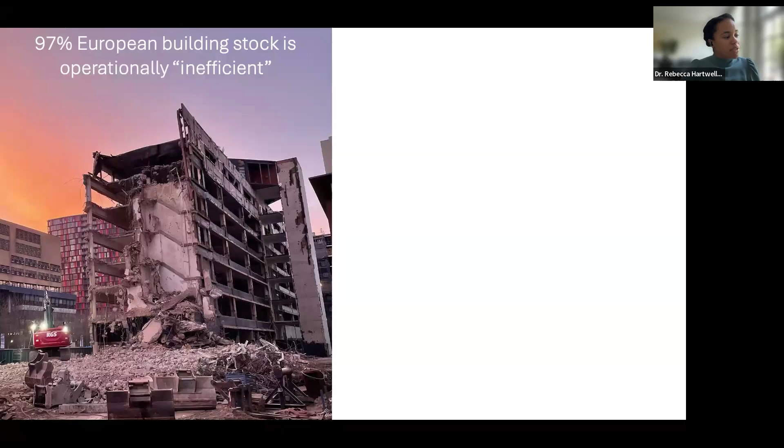Facades and internal mechanical and electrical systems are key contributors to operational performance, and typically within those elements we use high volumes of aluminium. So looking at how we can design those in an effective, efficient way from a material point of view, but also for reuse, is key. There's renovation as a challenge to tackle, but also how we can develop new designs and systems that promote future reuse and high-value recycling.

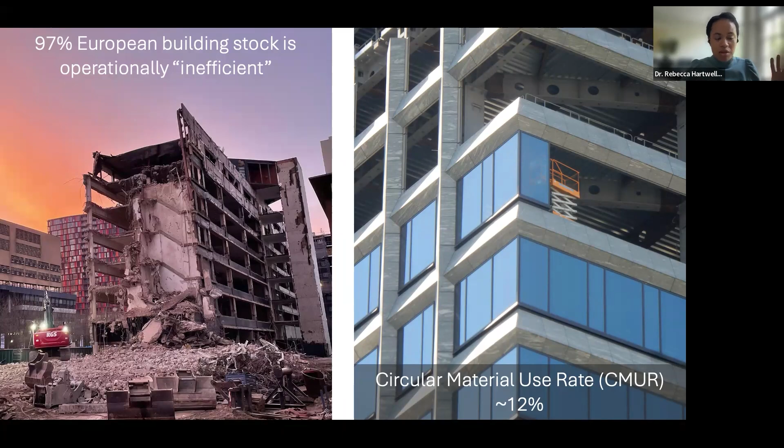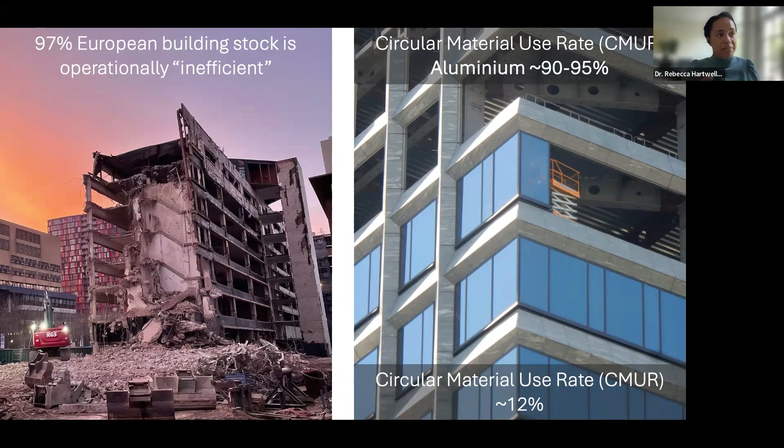The circular material use rate in Europe is around 12%, typically looking at low-grade recycling or other recycling options. For aluminium, that's much higher within the construction sector, around 90 to 95%. But again, this circular material use rate mainly focuses on recycling, which may be closed loop, but not reuse of aluminium elements, which could be a more environmentally valuable route to deploy.

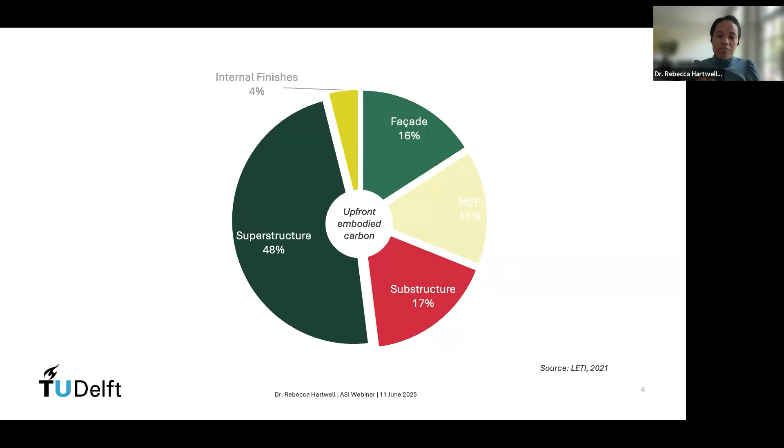If we look at this in terms of environmental impact and embodied carbon, looking at the building as a series of different elements—and aluminium mainly focuses within the facade and mechanical and electrical services—you can see from an upfront embodied carbon perspective, these are relatively high contributors to the total building's upfront embodied carbon. So understanding how we can recover these elements effectively is really key.

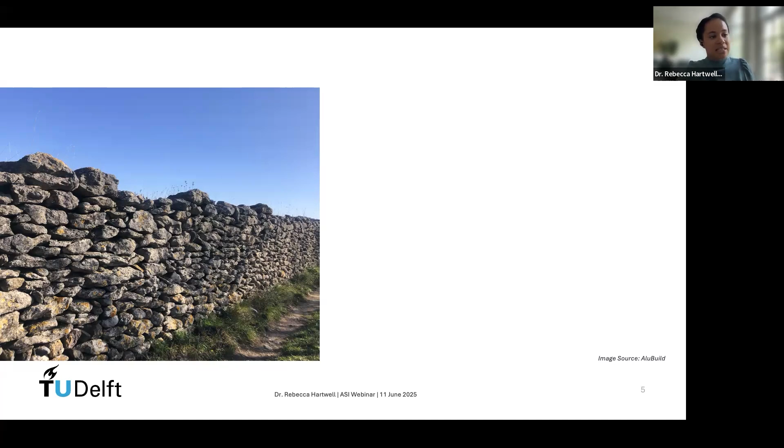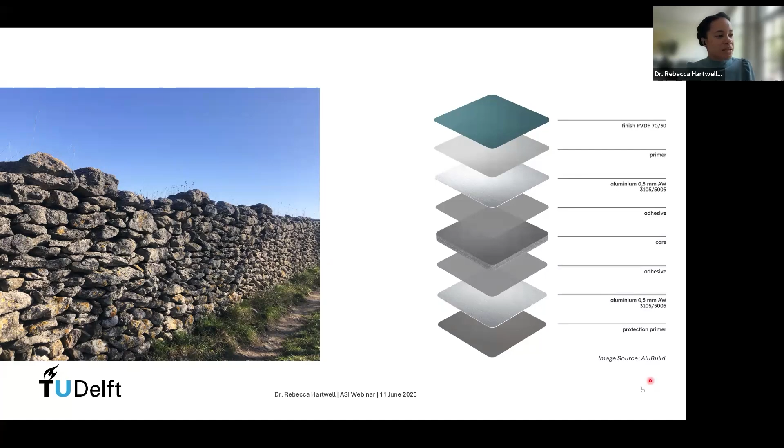But then if we look at the elements we're now incorporating into existing building stock to improve functional performance and operational use, we start to rapidly build up much more complex layers. For example, looking at aluminium composite panel, we may start with an aluminium backing sheet, then incorporate different polymeric insulating cores bonded by an adhesive component, then bond that core to another backing sheet on the other side, and then coat or finish the aluminium sheet. So quite quickly you start to see these complex building elements being built up without much consideration for what will happen at end of life.

There's an interesting concept put about by William McDonough and Michael Braungart in their book Cradle to Cradle, of the monstrous hybrid, which is a product that contains a mixture of materials or assemblies of components from which it is not economically feasible to recycle or salvage the raw materials after their current life. Unfortunately, this is quite telling for many of the building elements we're starting to incorporate in our building stock, or have been for the last few decades.

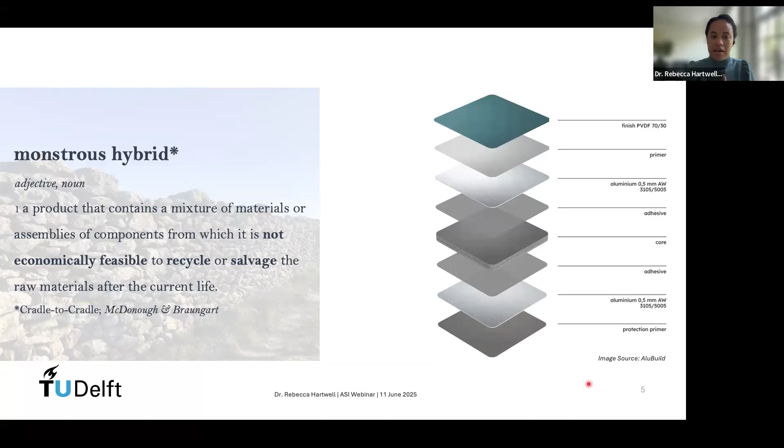My research really focuses on how we can continue to make technological advancements that improve building performance in operation without foregoing this reclamation potential, which I'll define throughout the course of the webinar today. But essentially it's the ability to easily reuse and recycle elements from our building stock.

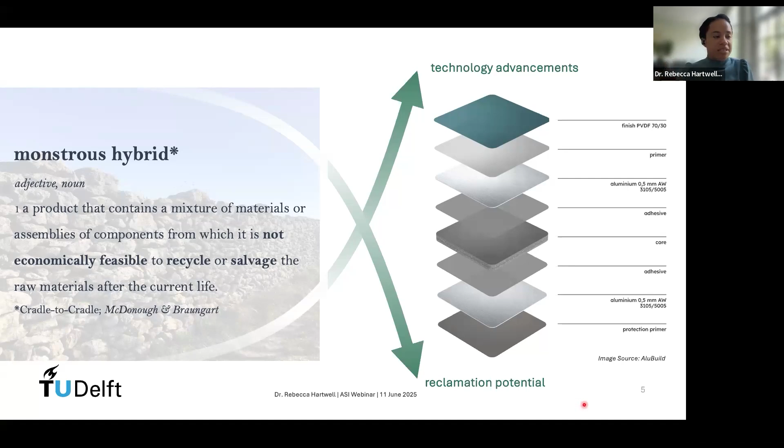As I mentioned, it's not just the composite panels - there are many other applications of aluminium within buildings, for example within sun shading louvers, which are quite commonly used now in more high-end facade systems. Also as spacer bars within insulated glazing units, where you can start to see this kind of monstrous hybrid assembly building up once again. And also very frequently as framework elements for curtain walling units for buildings, which enable you to have a very lightweight hung facade system attached to the primary load-bearing structure.

These aluminium elements can be quite bespoke, but also express a level of standardization. So looking at opportunities for reuse is really key here, but that really depends a lot on how these connection types come together.

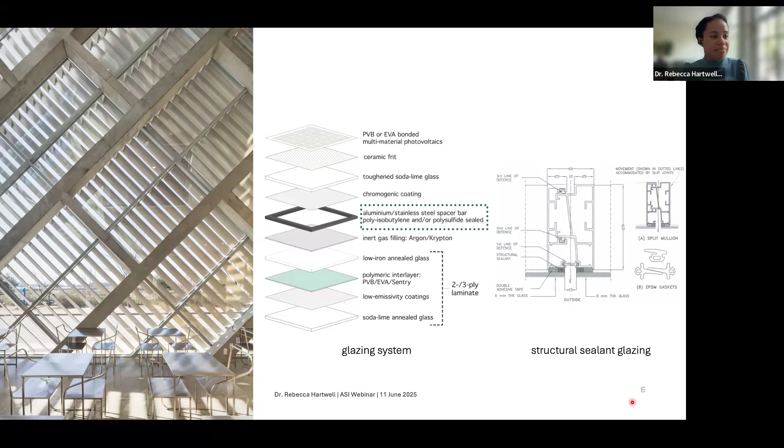So when looking at minimizing environmental impact as a whole, there are two key themes to focus on. The first is thinking about how we can potentially reduce material upfront and use less material by design. The second is looking at the recovery stage - how can we collect existing materials in our building stock in a way that's efficient, enabling us to reuse and potentially remanufacture products at high value.

But what's often missing is this link between design choices in terms of material selection, how components are connected to one another, and their eventual form, the level of standardization, to the recovery. So how does the choice of material or how a component is connected to one another influence the ability to reuse that product?

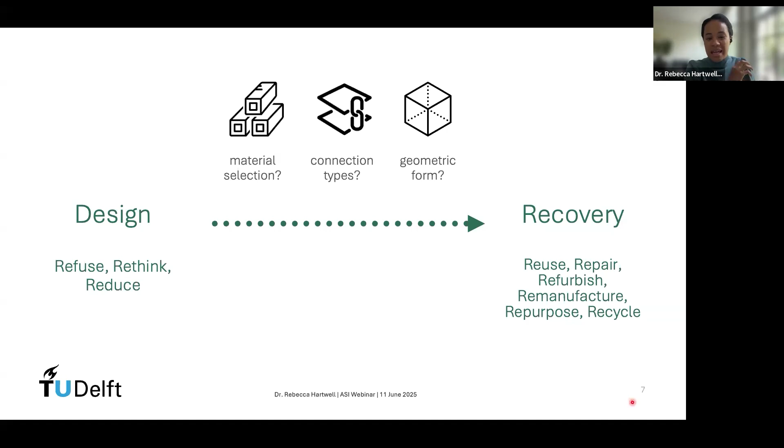I think this is a really key gap that's been expressed by industry. We've conducted many different interviews and surveys with industry, primarily with the facade value chain, the building envelope value chain, speaking with clients and developers through to manufacturers and demolition contractors. At present, whilst there have been many recent developments in this area, facades, or the building envelope, are often seen as a highly complex component for which dismantling is typically overcomplex and not worthwhile.

You also have a very wide mix of service lifetimes within the facade itself. So not just the building as a whole, but also within the facade, the different components that you have. This can influence the obsolescence of the total component.

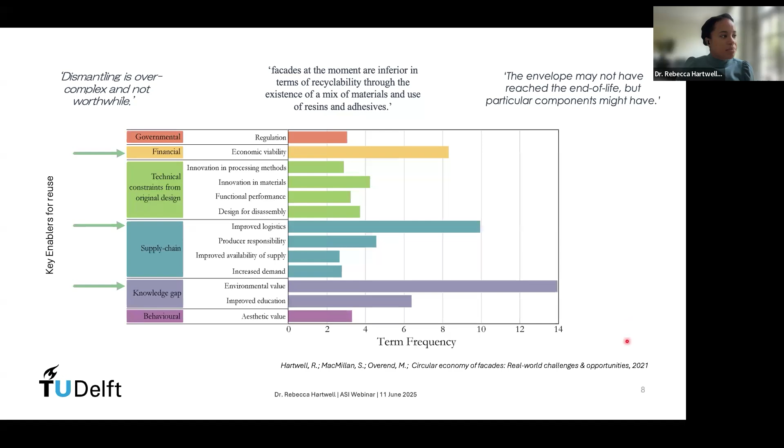Some of the key enablers for reuse that have emerged from these qualitative studies actually arise around quantifying the environmental value of design for disassembly, improving logistics for different take-back schemes to enable greater percentages of reuse, and also quantifying and justifying the economic viability. But today I'd like to focus on the quantification of the environmental value.

So there are some existing methods for evaluating life cycle assessment, using life cycle assessment as a way to evaluate environmental impact. You can use this method to assess many different environmental indicators, for example global warming potential, or the use of renewable or non-renewable energy. Within this internationally standardized method, you look at the life cycle of a building component, product, or building as a whole within four different life cycle stages: A, B, C, and D.

Life cycle stage A is related to the production of a product, the primary raw material supply, and eventually the fabrication and construction within a site on a building.

Then there's stage B, which is the use stage, so everything associated with the use of the product in a specific application, and also operational energy and water associated with its use. This includes the impacts of replacing components over the lifetime to maintain the product in use, and also any repair procedures that might have to take place.

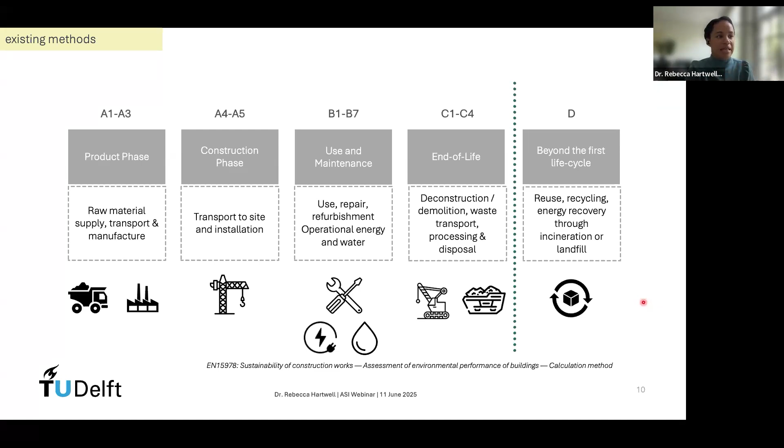There are some limitations to this module D as a way to evaluate the circular economy within building products and products as a whole. It tends to focus on single components or material types, looking at just one material in isolation, as opposed to it being embedded in a multi-component system. In that sense, it disregards the influence of different connection methods and construction technologies, so the dependencies between how components are connected to one another.

There's also some lack of harmonization between different countries in terms of whether or not to include module D. For example, in the Netherlands, module D is commonly included in the assessment method, which can make it difficult to compare products from different regions.

And there's also no consideration for future decarbonisation of industrial processes, such as decarbonisation of the grid or localised manufacturing facilities. And to some extent, it fails to account for the uncertainty of the actual end-of-life route that's deployed in practice.

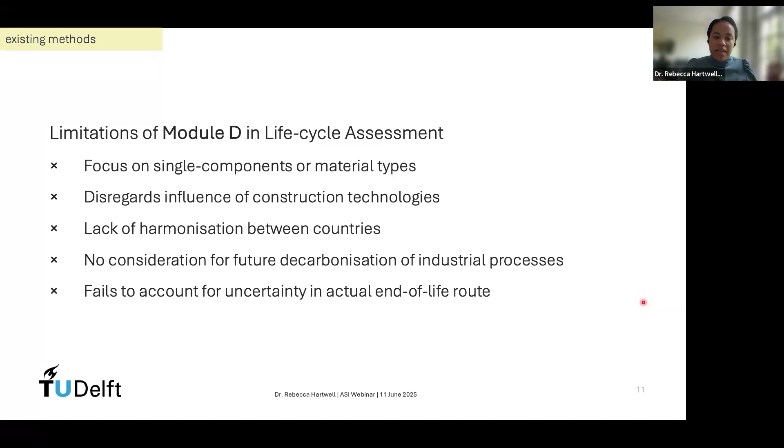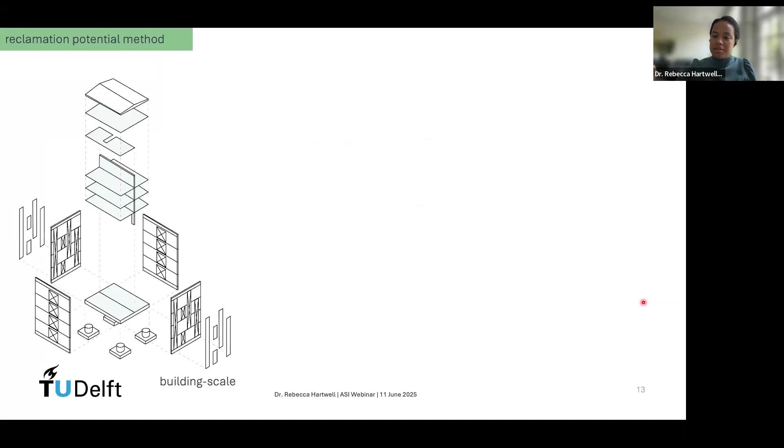So this brings me on to the development of this reclamation potential method, which we've developed as part of my PhD and then more recently within my postdoc here at TU Delft. The goal of this method is to be able to look at multi-component systems over multiple life cycles and understand how design changes influence the ability to reuse elements over multiple life cycles.

At the moment, we're looking mainly on the building element scale, and we've trialled this process in the context of facade systems, but there could be scope to scale it up to the building level as well, looking at many different components such as structural floor systems, roofing systems, and otherwise.

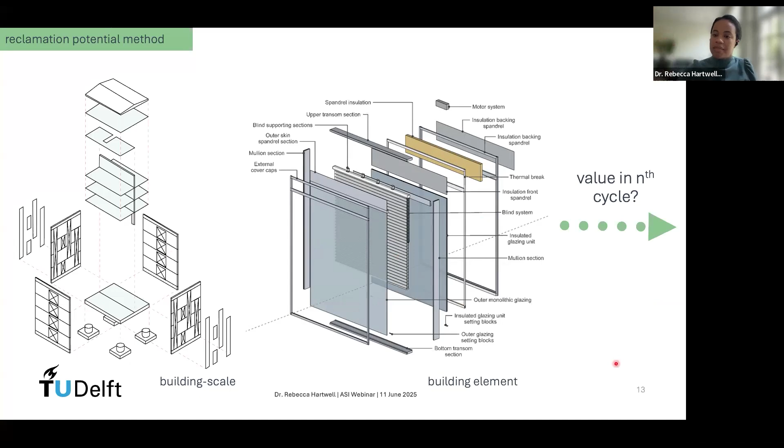As I mentioned, the key part of this assessment is understanding its value in the second, third, or nth life cycle. Why we find facades a particularly interesting case study to look at is that they are often these kind of multi-component systems with a relatively medium-term service life, depending on which industry we're talking about. From our surveys and interviews, we found that facades typically have a service life of 10 to 50 years.

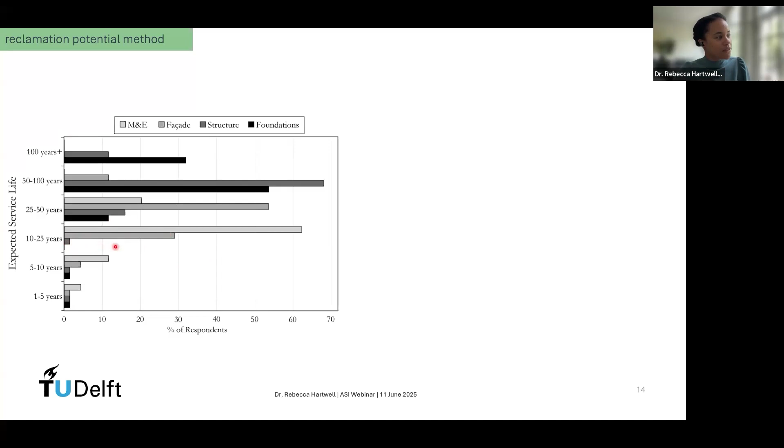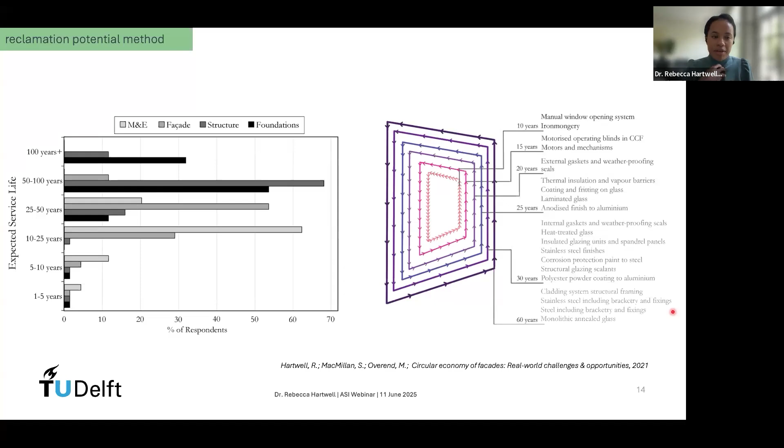This obsolescence arises for different reasons in terms of service life, not just technical reasons. But if we were to look at the technical reasons for short service lifetime, it varies very much within those components in a facade system. For example, some of the motorized components in a facade system may have a service life of 15 years. But some of the framework elements, such as aluminium framework elements, stainless steel cladding elements, and monolithic glass, can have a lifetime of much longer, up to 60 years and above. Understanding the influence of these service life dependencies, we found, is really key to incorporate in the assessment for reuse potential.

So the current project that we are working on is called Project Reclaimed, in partnership with the TKI, which is a Dutch government funding agency, and Scheldebouw, who are a facade contractor and manufacturer based in the Netherlands and more widely known as Permasteelisa Group globally. They are responsible primarily for curtain walling systems.

Together with the team at TU Delft, consisting of Professor Mauro Overend, myself, Lisa-Marie Mueller, and Dr. Michela Turrin, we're working at scaling this assessment method up and developing a digital tool to understand the reuse potential of different building elements over their lifetime.

I'd like to introduce the workflow of the current assessment method. First, we try to understand the materials that exist in a specific building element as a mix of components, and understand the service lifetime of these materials, so when they are likely to fail over their lifetime. We assign a probability distribution to understand the performance deterioration of these components over time.

Those inventories are standalone inventories that we incorporate into the assessment, but then we have our system-specific data for the current product under analysis. For example, if it was an aluminium composite panel, we assemble a components inventory, which could consist of the aluminium, the core, the adhesive elements, and also how those components are connected to one another.

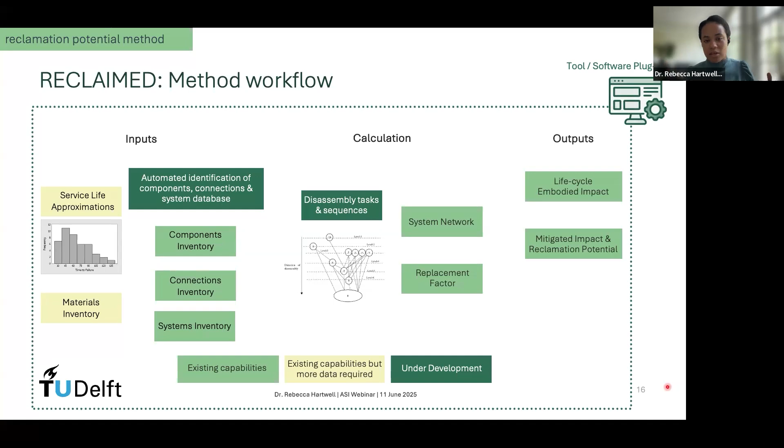So just to walk you through some of these key inputs for the reclamation potential method. I'll start with one of the key ones, the materials inventory, which at the moment we actually assemble manually from existing environmental product declarations, where we detail the type of material, the different processing conditions, and the associated environmental impact. We could look at automating this data extraction process from EPDs to our materials inventory.

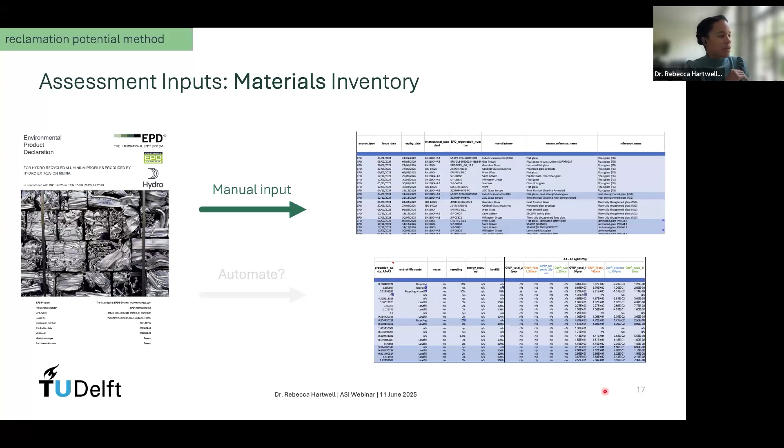But in the next couple of years, we see this information will be more readily stored in a digital format online. So that's how we see this evolving in future.

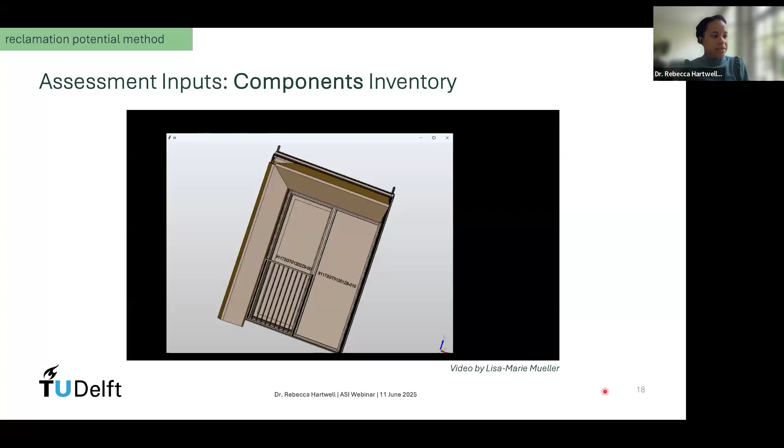And then we also assemble this components inventory, which I mentioned we're looking to automate at the moment. This is a digital file showing a construction drawing where we've been able to extract the information to understand exactly which parts exist and what material those parts are made of, and their volumes, their geometry, to be able to evaluate their environmental impact.

And then the other assessment input is the connections between these components that exist. As I mentioned, this is a key difference between assessing Module D. We include this nuance associated with service life dependencies between components.

For example, if we were to have a system such as that shown on the slide here, with a three-component system, where we had component B and C, which are irreversibly connected to one another, but component A and B, which are reversibly connected to one another.

Because component B is irreversibly connected to component C, even though component C has a service lifetime of 10 years and B is 30 years, we have to replace both of these components when component C reaches end of life. So there's an additional environmental impact in this case to be considered. This is where we really try to account for varying durability of elements within a product to assess true environmental value over time.

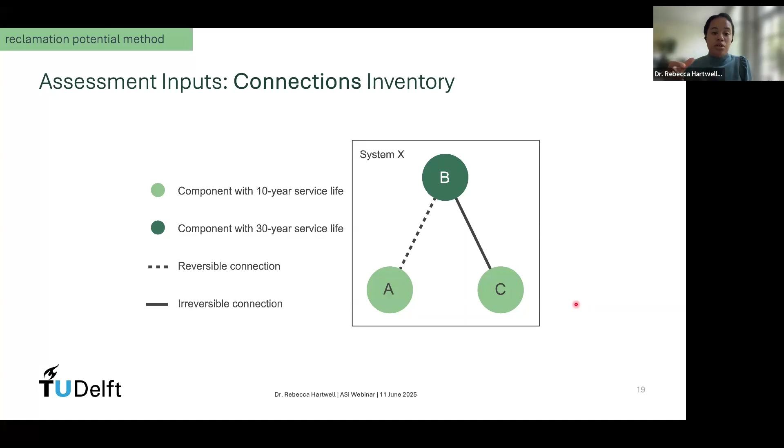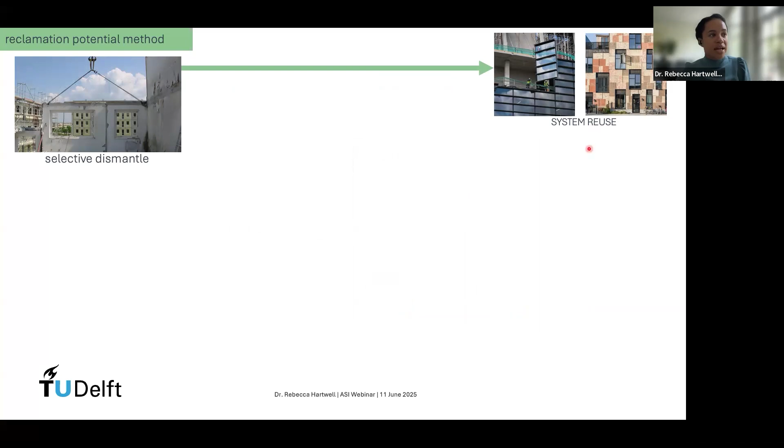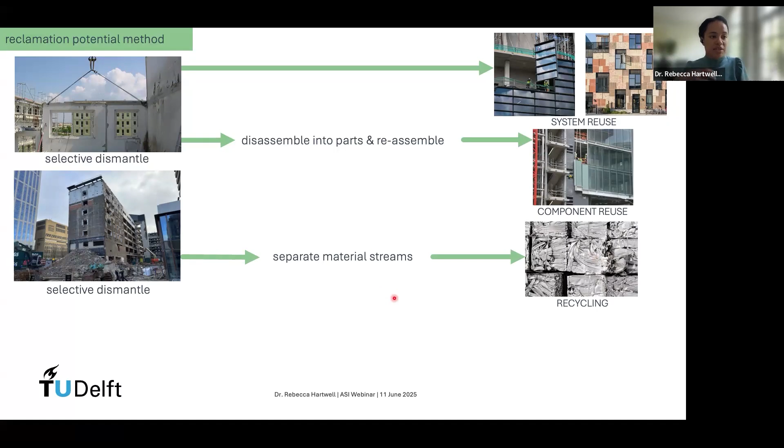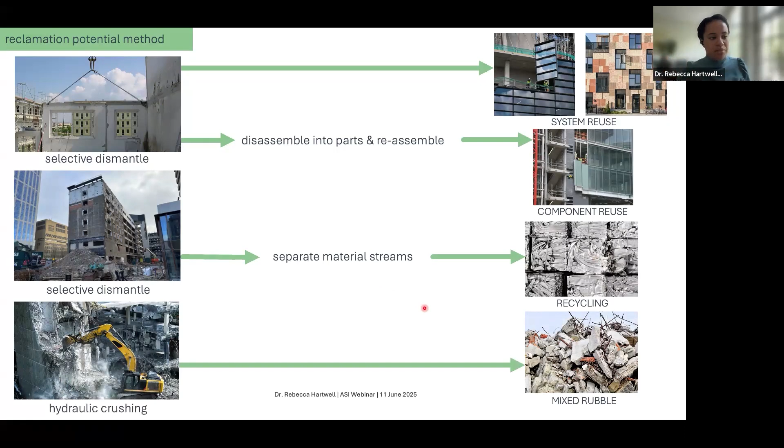We assess four different recovery scenarios within this method. The first is selectively dismantling the facade element or other building product element and directly reusing it elsewhere. The second is disassembling this multi-component system, reassembling and remanufacturing it into a new system to be incorporated onto a new building. The third is separating material groupings, which is widely done at the moment with aluminium products—separating different materials on site and recycling them back into new products of the same type. And finally, the worst case scenario as a benchmark comparison: mixing all materials up on site, going to either low grade recycling options or, at worst, landfill.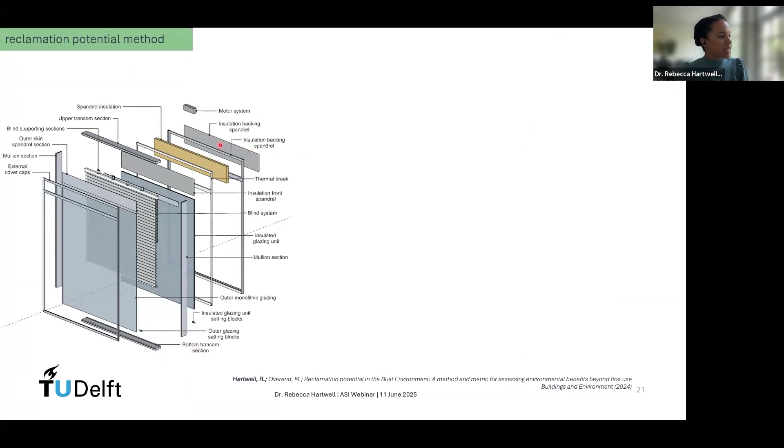So through this assessment method, just to give you an example, this is a double skin facade that you see on this slide. You can start to see the different components—the aluminium-containing components, particularly the framework elements and the spandrel sections, the backing and front sheet for the spandrel sections, and also the blind system.

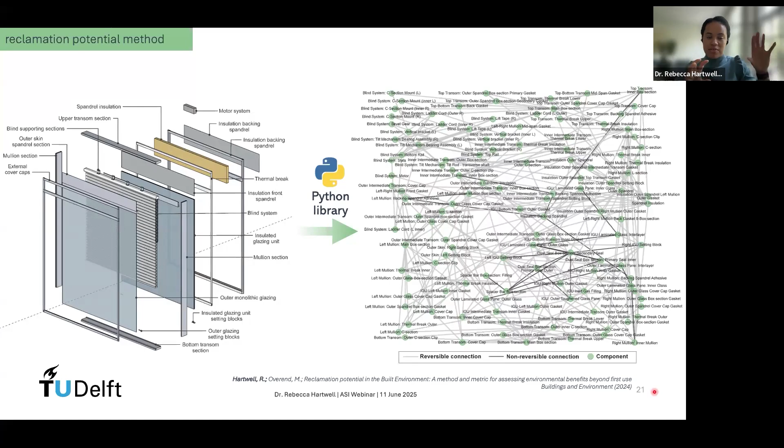From this construction drawing, we can generate a system network map. This network map is a series of components that exist in the system and the type of connection between those components. A node on this map corresponds to a component in the system shown on the left, and the edges between the nodes correspond to the type of connection that exists between components. So you can think of this as the key data resource that we use to evaluate the lifecycle environmental impact and also the reclamation potential, where we assess the difference in terms of deconstruction of different subsystems and reuse potential across different life cycles.

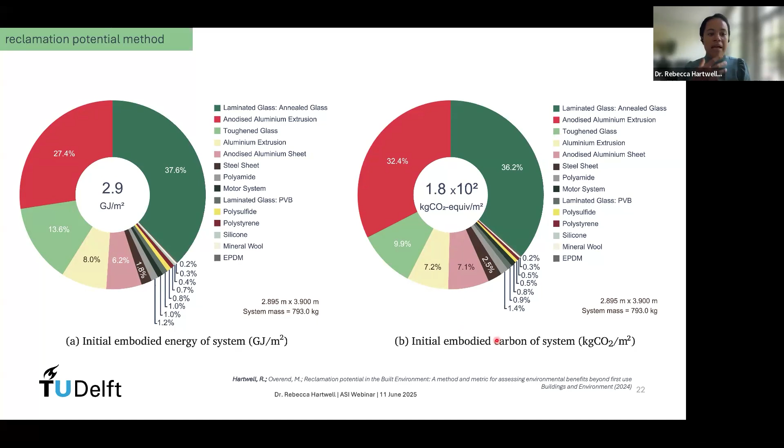From this assessment, we can evaluate the upfront embodied impact, which may be in terms of carbon or otherwise. For this double skin facade system, the upfront initial embodied impact is 180 kilograms of CO2 per meter squared of facade surface area. We can separate this out into different components—you can see aluminium accounts for around 32%, anodized aluminium extrusions, and then sheet and regular aluminium extrusions account for an additional 14% of the total. So already here we can start to see which materials we might like to target for optimizing material efficiency to reduce the upfront embodied carbon.

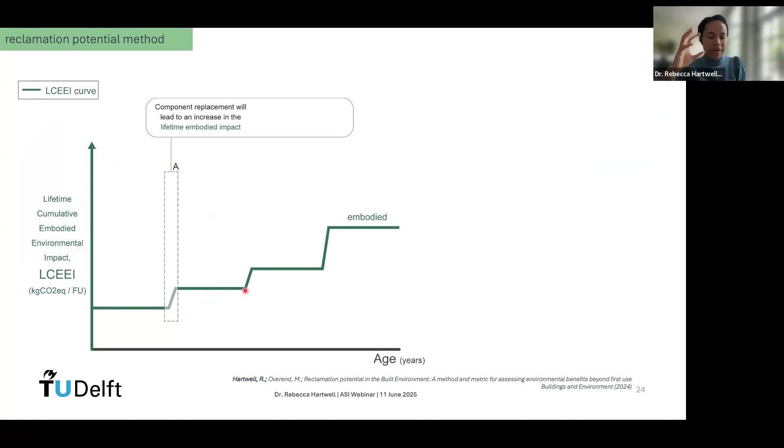It's not just the upfront embodied carbon we assess, but also the life cycle embodied carbon over time. When we have to replace a component because it's reached the end of its service life, we can understand that at 30 or 50 years, because of that component replacement, we get a jump in the life cycle embodied impact—so we see a growing embodied impact in terms of an environmental indicator over time. Those recurring embodied impacts account for the different service life dependencies between elements as well.

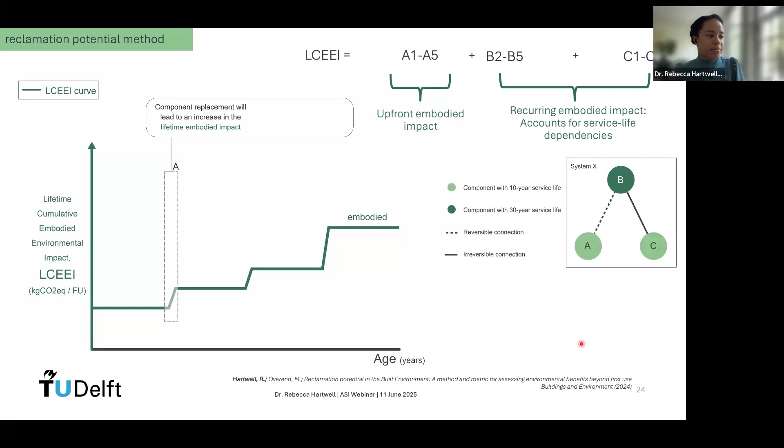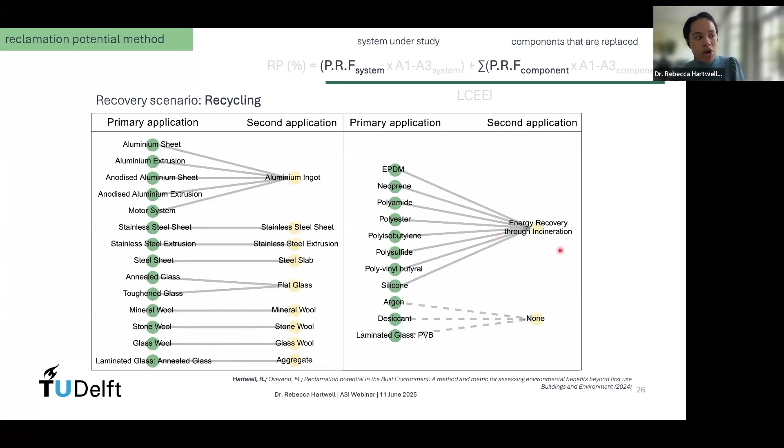We consider a performance reduction factor, which accounts for what materials were used in the first instance and what deterioration might have taken place. For example, in the recycling scenario, we can't assume materials go back to the same product, so we map the material in its primary application to the material in its secondary application—in some instances a form of closed loop recycling, but in others, such as laminated glass, it may be downcycling to aggregates or even energy recovery through incineration for polymers. So we include that performance reduction factor for the recycling scenario.

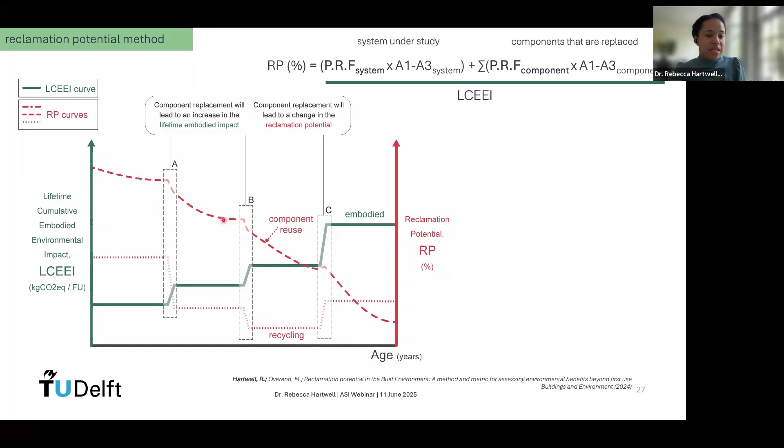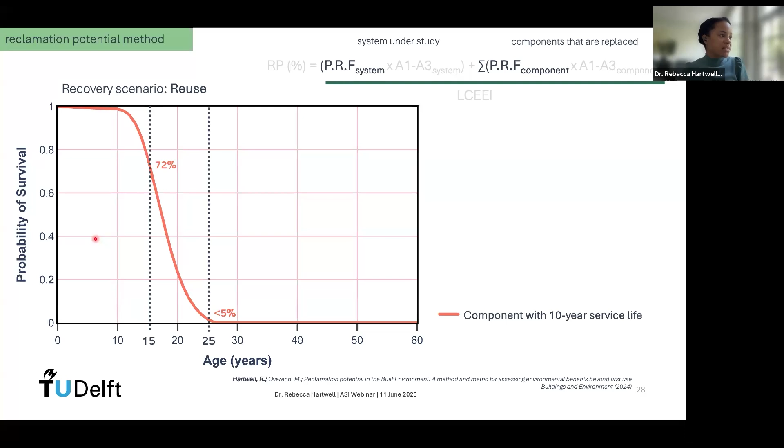Similarly, for the reuse scenarios—component reuse and system reuse—over time we include another performance reduction factor, which accounts for the deterioration of the performance of this component. For example, I've plotted this probability of survival graph for a 10-year service lifetime component. Over time, you can see how the probability of survival drops off rapidly after the 10-year service lifetime: at 15 years the likelihood of survival is 72%, dropping rapidly to less than 5% at 25 years. This helps us distinguish the benefits between short and long lifetime components, and we can start to compare that on this graph.

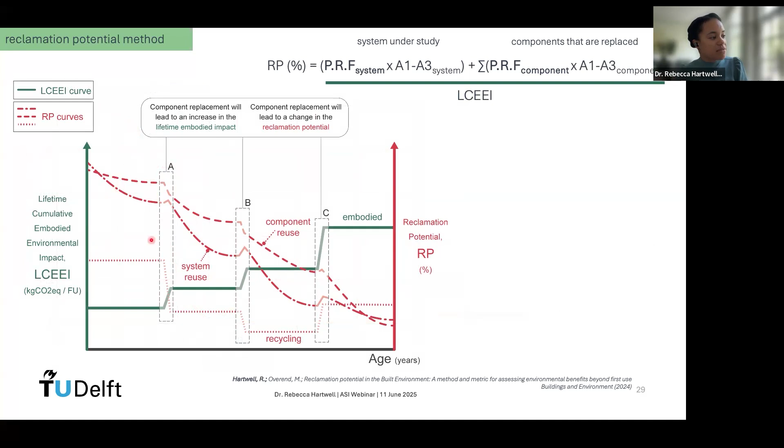We include this performance reduction factor when evaluating these two reuse recovery scenarios. Essentially, this graph is what we use to make design changes, which might then enable us to shift these curves up—the recycling and reuse curves, the reclamation potential over time—and also to potentially understand which is the best recovery route to deploy.

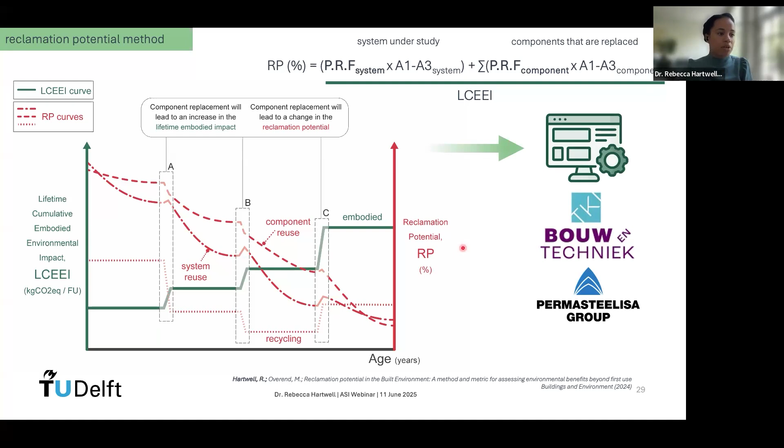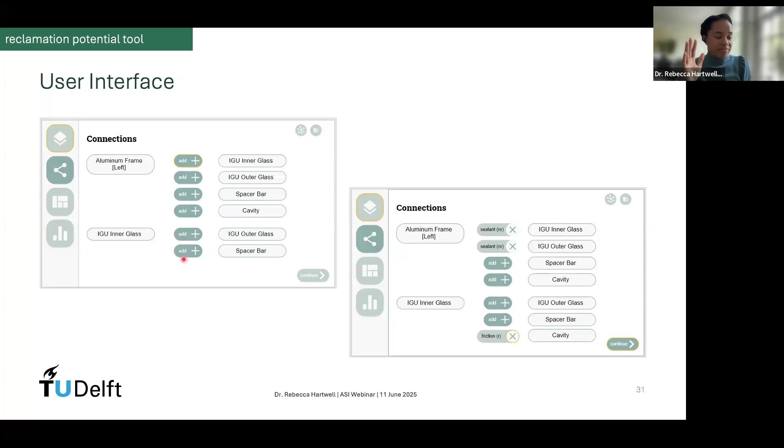So this is something that we're scaling into a tool at the moment within the current project, a simple graphical user interface with the partners I mentioned before. Within this tool development, this is a very simple user interface where we can start to build up a product. So either we could extract that information automatically, as I showed before, or a user could come in and start to build up their product in real time and add the different associated components and elements.

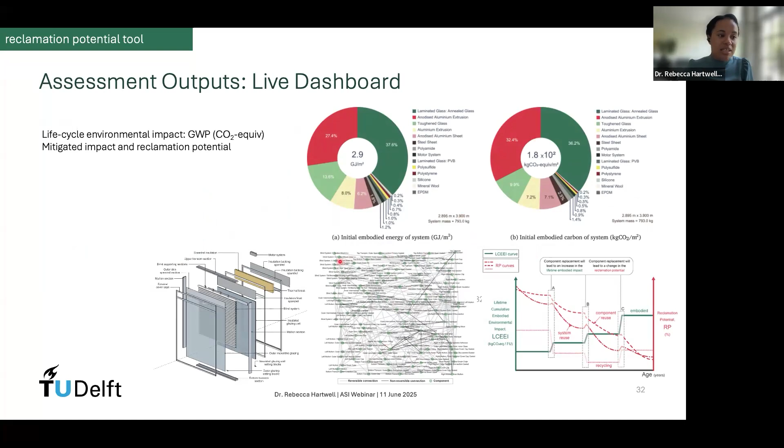And start to see a map of these components and how they connect to one another. We aim to showcase this in some sort of live dashboard, which the user can then see once they've completely populated their full system. And then based on this, start to make changes in the design, which may then influence these results.

So just to conclude, really, I just wanted to highlight the development of this assessment method to date, of the reclamation potential as a method to understand the benefits of different design decisions on the ability to reuse and recycle products at end of life. And a key nuance in that is understanding the durability of elements.

Our next stage is how to validate these assessment inputs, the probability of survival functions, and also the materials inventory, and continue to develop this web or app-based user interface in collaboration with practice. We're very grateful to have Permasteelisa, the facade manufacturer, on board with this to date, but we're also open to looking at scaling it to other building elements and also other sectors.

And understanding how this interacts with different economic business models as well for remanufacturing, and could potentially be implemented into policy. So I'll leave you with that for today, and I'll very much welcome any questions and feedback that you may have.

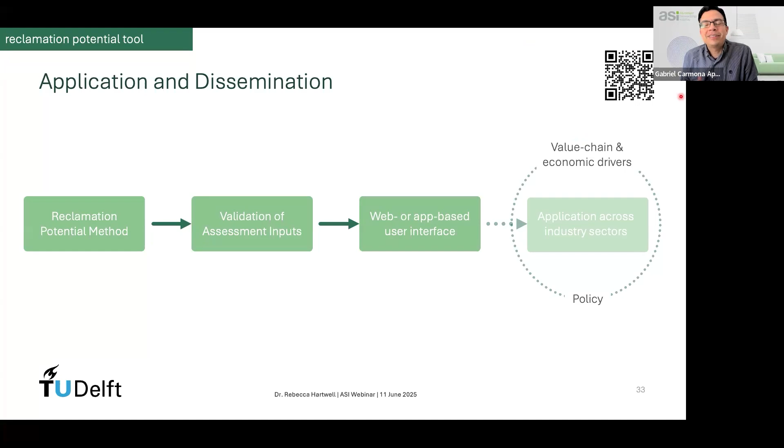Thank you very much, Rebecca, for a very interesting presentation. Very insightful. I like the concept of monstrous hybrid, very new to me. Well, we got some questions beforehand, but also there's one on the Q&A box.

So probably I'm going to reframe it like, how do you see this method being scaled across industries, such as, for example, automotive? And what would be needed to adapt it beyond the built environment?

So I think that the concept itself, in terms of assessing these kind of multi-component systems, could be scaled to the likes of automotive or transport sectors, where we have typically this wide ranging mix of materials with these differing service lifetimes again. I think having the input on the deterioration of those components would be really key from those with expertise in those industries. So understanding those inputs would be essential for performing an accurate assessment.

But the concept itself for using it to assess design changes, I think, could be readily applied to these other sectors. Nice, thank you. Remember to post your questions in the Q&A box. Another question we got before was, where do you envisage early adopters for this reclamation potential method?